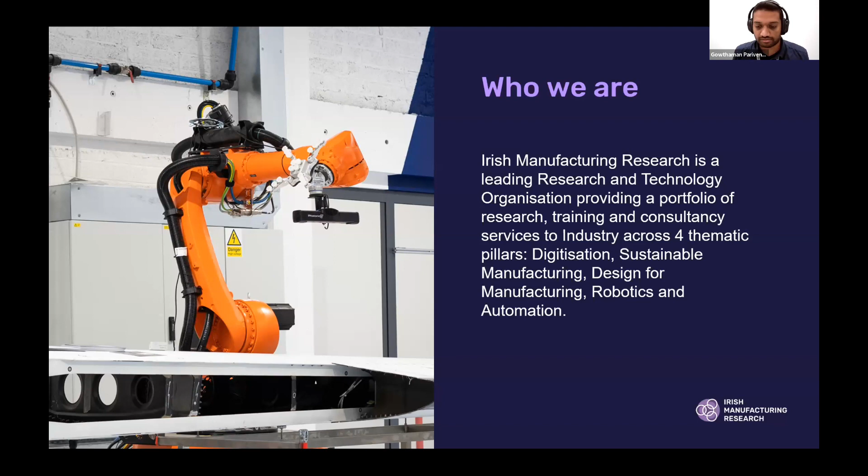So, IMR is a leading research and technology organization. We have dedicated researchers working on digitization, sustainable manufacturing, design for manufacturing, robotics and automation, etc. So, our aim here is to help Irish companies to adapt latest technologies to enhance their production capabilities. So, in that regard, I'm going to show how simulations could be of help addressing some of your manufacturing problems.

So before I answer why we need simulations, I'll explain what are simulations. Well, simulations are representations or imitations of a real event using mathematical models. So why do we need them? Well, they offer cost-effective outcomes for various processing conditions without having to physically perform the experiments or processes.

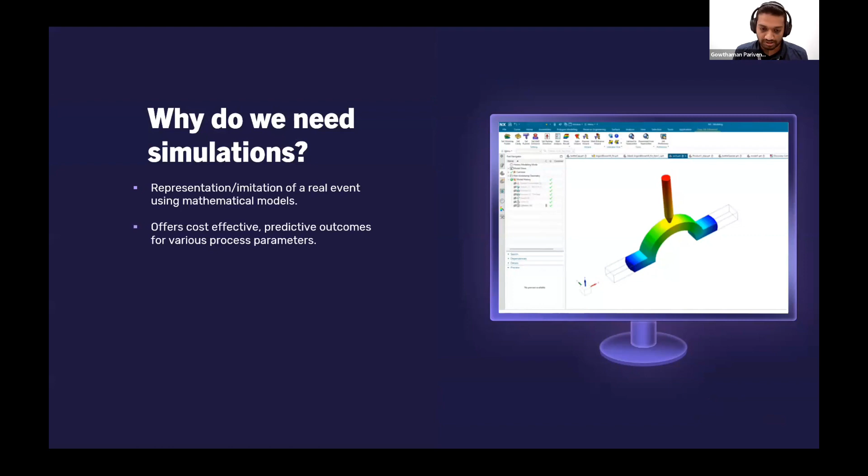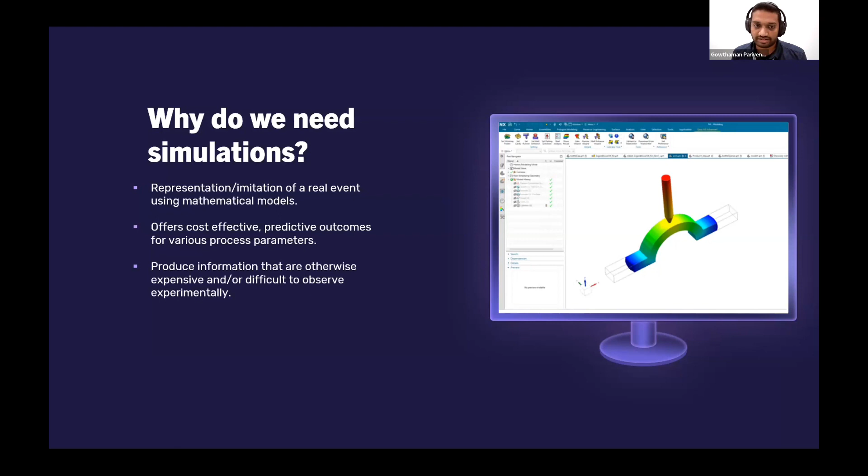And sometimes some of these physical parameters, they are tough to observe or measure using experimental setups. It could be expensive, it could be of a health and safety concern. So in those areas, simulations would be of help as well.

So mechanical simulations, as I said, they typically solve a partial differential equation that describes the mechanism that we are investigating. And throughout this talk, I'll be talking only about physics-based models; the discrete event methods or process simulations or kinematic models are not covered in this session.

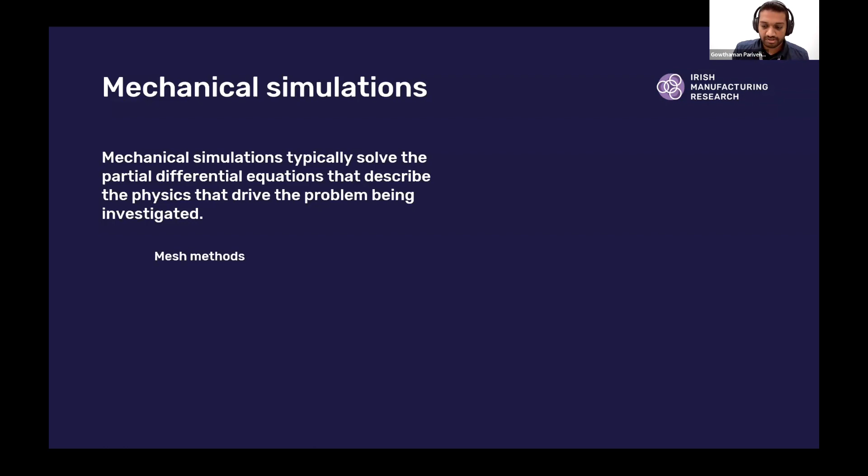So the most commonly used mechanical simulations are mesh-based, and that's because they cover most of the manufacturing problems that we face. And some of the common numerical tools include finite element method, finite volume method, finite difference, etc.

But there are some scenarios where we need meshless methods, like powder or granular geometry. And we treat each of these powder particles as a single entity. And in those scenarios, we might use methods like discrete element method or smoothed particle hydrodynamics or molecular dynamics. So some of the meshless methods out there.

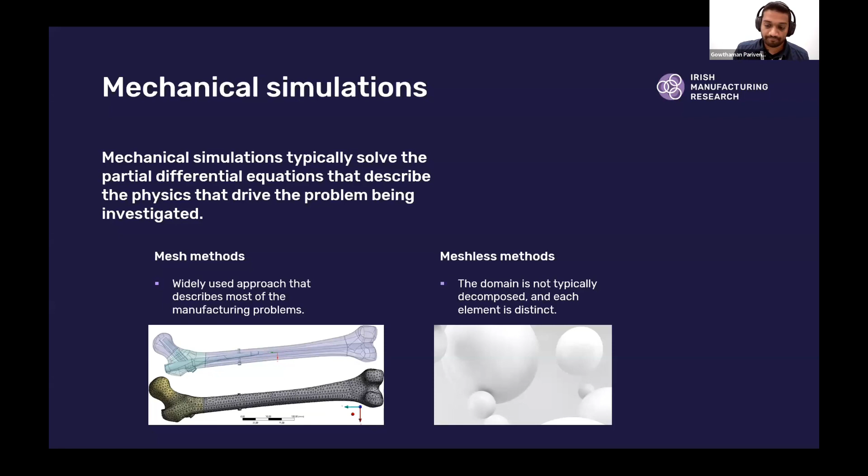So in the next session, I thought I will walk you through the workflow that we implemented in a project where numerical simulations played a crucial role in enhancing the process. So conformal cooling, it's a mold cooling technique in which we ensure uniform temperature gradient through the cooling process. So why do we need this?

Well, in injection molding, when the part is cooled by the cooling channels, the non-uniform cooling builds residual stresses in the part. And when the part is ejected from the mold, it might deform. This, of course, is not desirable for the company. And also because the cooling channels put in effort in cooling the bulk of material as well, there's increased cycle time. So how can we address this?

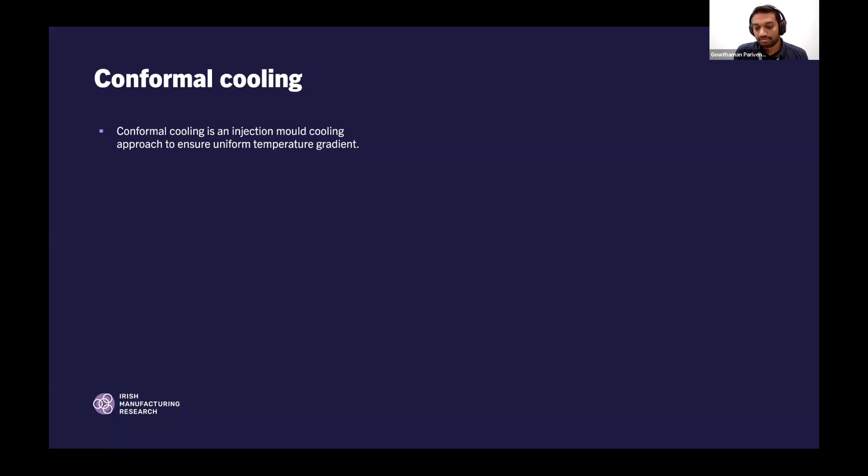Well, we can do that by conforming the cooling channels as close to the part shape as we can. But traditional manufacturing methods are constrained in this regard because the path lines of these cooling channels are 2D in nature. And these 3D conformal cooling channels can be manufactured by additive manufacturing, because that's a layer by layer manufacturing technique, and we can easily achieve these 3D cooling channels.

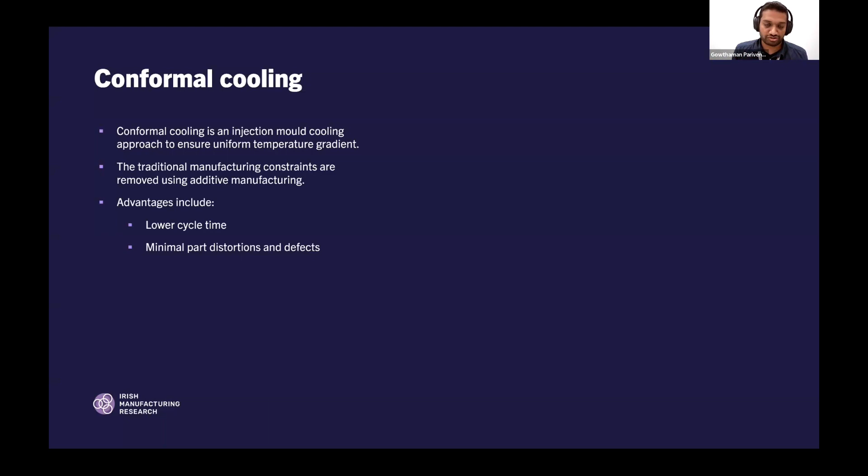So some of the advantages of conformal cooling include, as I said, lower cycle time, and due to the uniform temperature gradient, we can minimize the part distortion and defects, and there's also reduction in energy. And of course, we use simulation in finding out these conformal cooling channel performance, but how do we know if the simulations are right? So that's where we have to validate the model.

So we have a test rig in IMR where we heat a test coupon to a prescribed temperature. And once it's heated to that particular temperature, it shuts off, and the cooling channels within the test coupon cool down the part. And we measure this temperature over time and compare it with the simulations that are run using Simcenter 3D thermal flow model. So once we validate this simulation, we can be sure that it can be translated to the actual part that we are going to investigate.

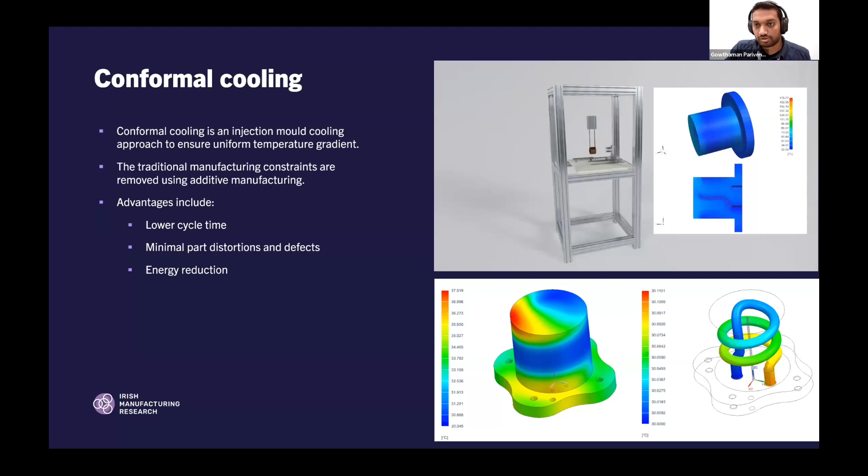So we also run polymer filling analysis using the NX EasyFill Advanced environment. And the reason we do this is because it offers us a quick view of where the hot and cold zones are, where the potential problematic areas are, etc. And based on this, we can design our cooling channels. We can either move the cooling channels closer to the hot zones or move them away from cold areas in order to achieve uniform temperature gradient.

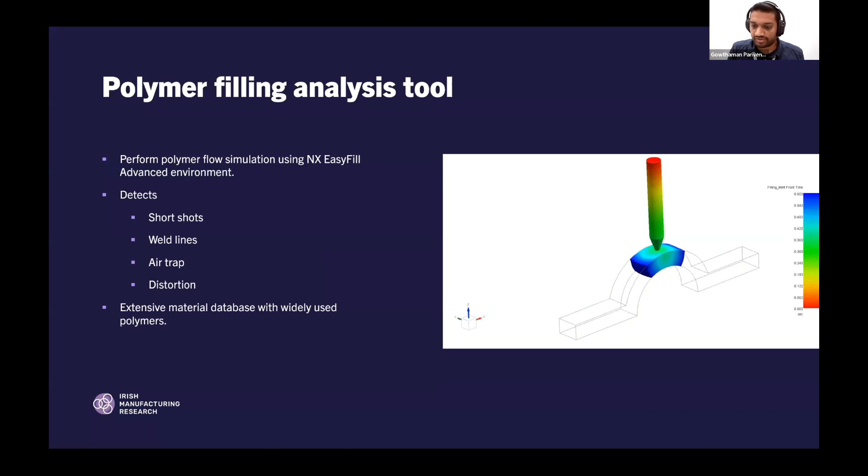In addition to that, we also can detect short shots, and we can detect weld lines, air trap, distortion, etc. And the polymer filling tool also comes with an extensive material database with all the widely used polymers out in the market. So we use the polymer analysis tool in tandem with SimCenter 3D to create these conformal cooling channels.

Here I'm going to show you a case study that we performed for Thormac. I would like to thank Thormac for letting us share the case study for this particular demonstration. So here we have an insert used in injection molding, and it comes with these. We used conformal cooling channels to cool down the surface of the part.

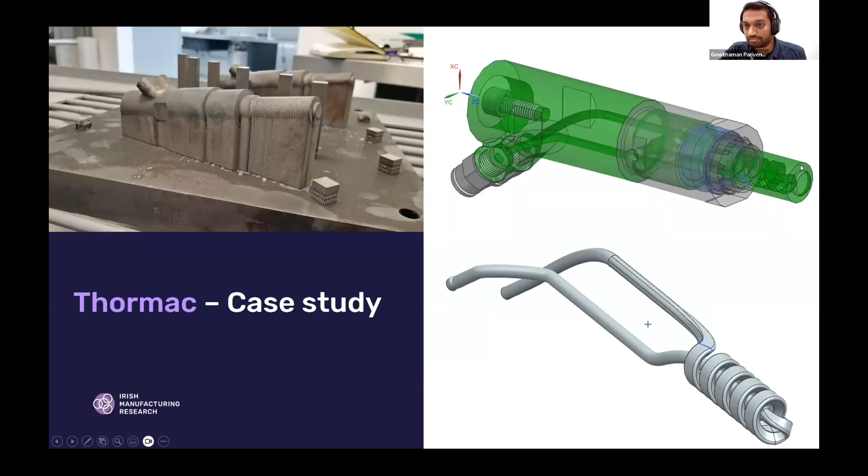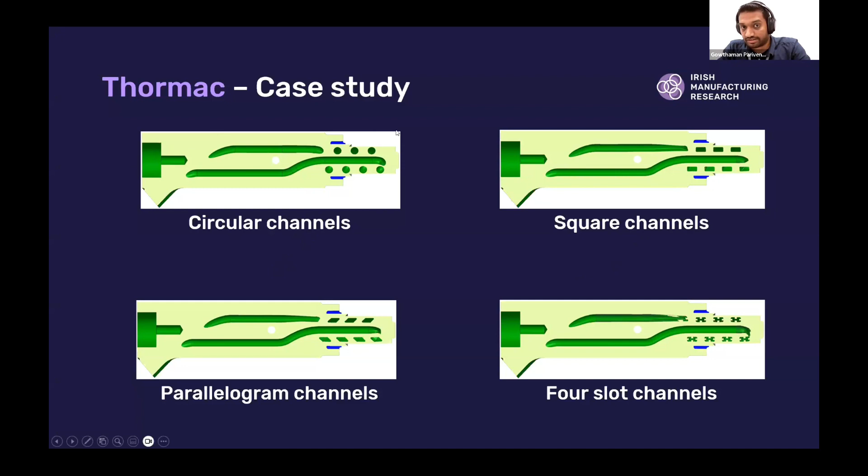We initially started with the circular profile for the cooling channel, and then we moved on to other profiles such as square or parallelogram. And again, I would like to emphasize that these parts can only be manufactured using additive manufacturing. It can be done with traditional methods, but then it's going to be really difficult to achieve these profiles. So the reason we moved on to several profiles is ideally we need a straight line like this to achieve a really nice consistent cooling.

But physically, that's not possible because for that to happen, we need just a single cavity that runs along the surface of the insert. And we start with the next thing, the circular coils that coil around the axis of the part. And we noticed that there is significant cooling on the surface where the circular channels are, but then there is an increase in temperature between them. So this ripple effect kind of induces non-uniform cooling.

So in order to address that, we have to either reduce the pitch, so that will reduce the cooling errors, but then we compromise on the structural integrity. So the other approach we use is replace the circular channels with square profiles. And with the square profiles, again, we notice there are issues between the channels. So that's where we use the parallelogram profile because the slanted edges of these parallelograms are exposed to the surface. So they kind of aid in cooling the surface a little bit more. And all these are done with the knowledge we gain from running numerical simulations in Siemens SimCenter 3D.

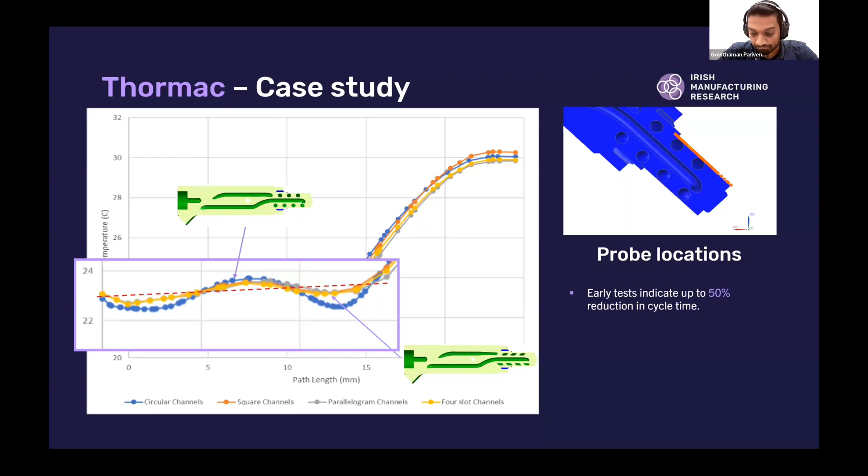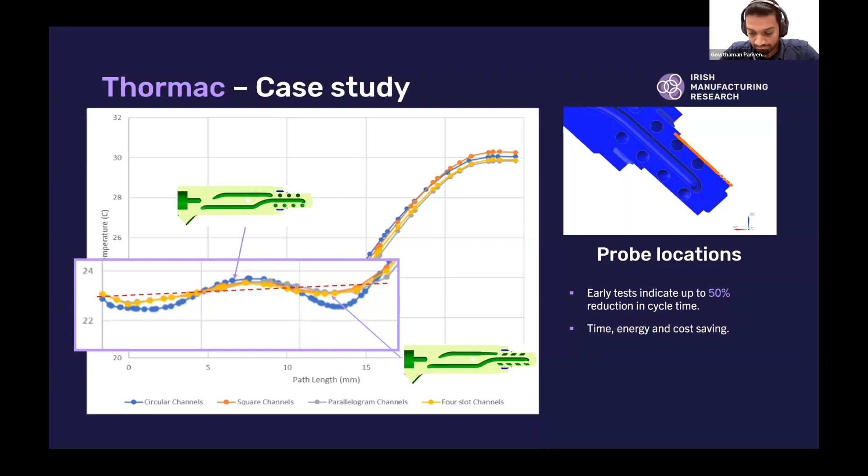So what does it mean? Well, it saves a lot of time for the company. They can now produce twice the number of parts in the same time. It can also save them energy and cost because they may not need to run two machines in parallel just to produce n number of parts. They can just achieve it with one. And these are some of the real impact that we achieved using conformal cooling channels in the injection molding process, where simulation played a crucial role.

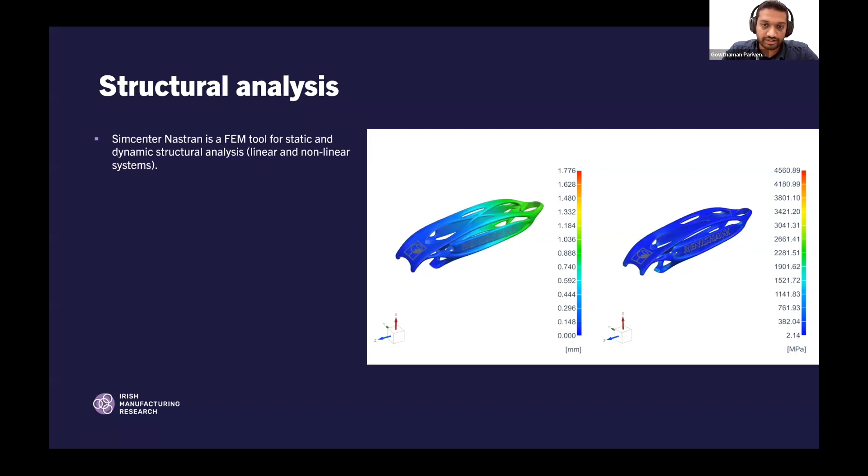And when we design these parts, we also have to make sure it's structurally sound because these parts are going to be exposed to a lot of pressure and wear and tear, etc. So we run a quick static study for these parts using the finite element tool in Siemens, that's SimCenter Nastran. And it has other potential applications as well, like it can be used for buckling, rotor dynamics,

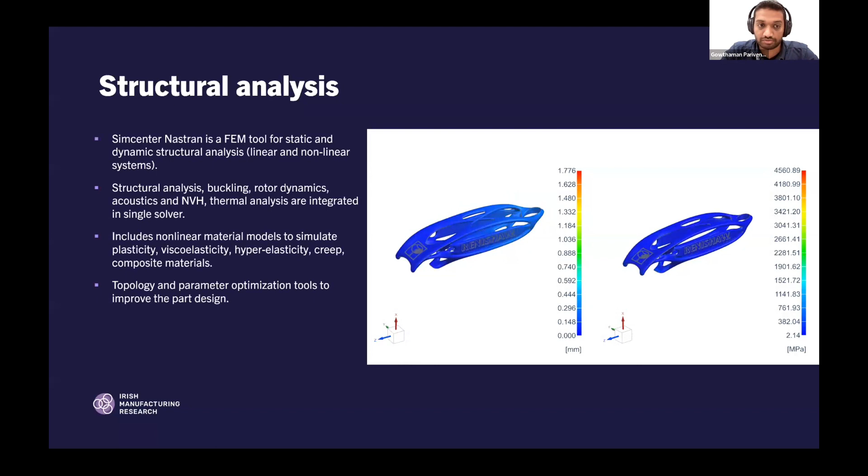NVH, thermal analysis, etc. And it can also model various material behavior like plasticity, viscoelasticity, creep. And it also comes with really advanced parameter and topology optimization tools in order to improve your part design. So these are some of the features in Simcenter.

And also, I mentioned additive manufacturing a lot, and we need to use the right set of processing conditions to print the part right the first time. And this is often really difficult, and simulations can play a role in helping us there as well. So the Siemens additive manufacturing tool can help us define the part geometry on the build plate with support structure, and then we can run the simulation to predict the temperature distribution. We can know whether there'll be any recoater collision, whether there'll be any overheating in the layers, whether the part will distort before or after the support removal.

And it also has a feature where it pre-distorts the part to create a compensated model. So when we actually print and remove from the support, it goes back to the original shape that we intended in the first place. So for example, the tool you see here, when we print this, because it is long and slender, it tends to peel off the support structure. So by using simulation, we can find the right orientation, the processing conditions, the location that we have to use in order to print it right the first time.

So before I move on to the next session, I just would like to summarize some of the features that we use in NX. So Siemens NX is a really powerful tool. I just talked about some of the modules that we use in the workflow. It offers much more than what we showcased here. And also, it offers a unified workflow.

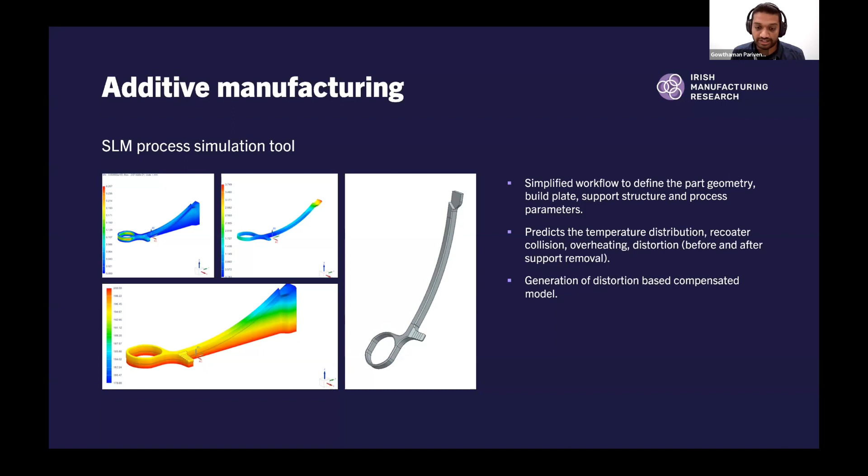By that, I mean, right from the design engineer to a simulation engineer, the technologist, all of us can use the same tool. And we can share the files without having to change the format. So it's a really powerful tool, and it's really easy to use as well. And with that, I will move on to the next tool.

That's OpenFOAM. OpenFOAM is also one of my favorite numerical tools out there. It is an open source tool that is primarily used for computational fluid dynamics, but other areas of application include heat transfer. It is used in electromagnetics, acoustics. It has a really sound solid mechanics platform, and it is even used in finance, like they solve the Black-Scholes equation to predict commodity prices over time. So these are some of the areas it is used.

And OpenFOAM versions come with a number of tutorials. And often we take the tutorial that resembles our problem at hand and we build on it. So it's a really nice feature to have at hand. And OpenFOAM is highly parallelizable. It is customizable and it's robust in nature. And there's also excellent support from the community.

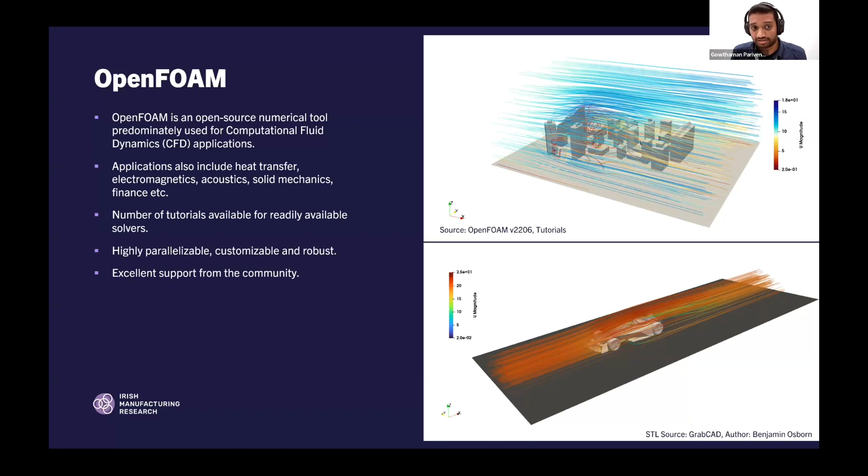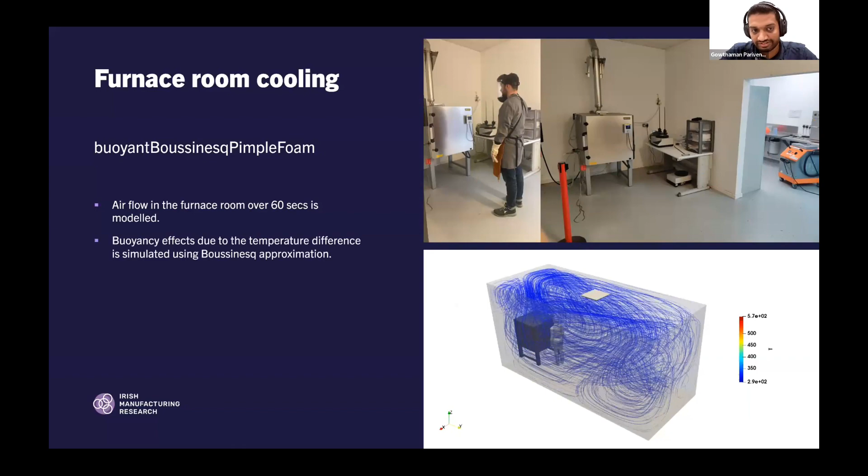So just to illustrate what OpenFOAM can do, this is one of the analyses that we did in IMR. It's to simulate the furnace room cooling over 60 seconds. So we study how the air flows when the furnace is opened, and we include the buoyancy effects due to the temperature difference using the Boussinesq approximation. So you might have seen this long name in the slide. These are the names that are often seen in OpenFOAM solvers. It basically describes what the solver is meant to do.

And we use the inlet condition for the AC, which includes both the flow and temperature, and the temperature of the furnace, and study the airflow. Some of the similar applications include HVAC, aerodynamics, architecture, and in fact, urban planning.

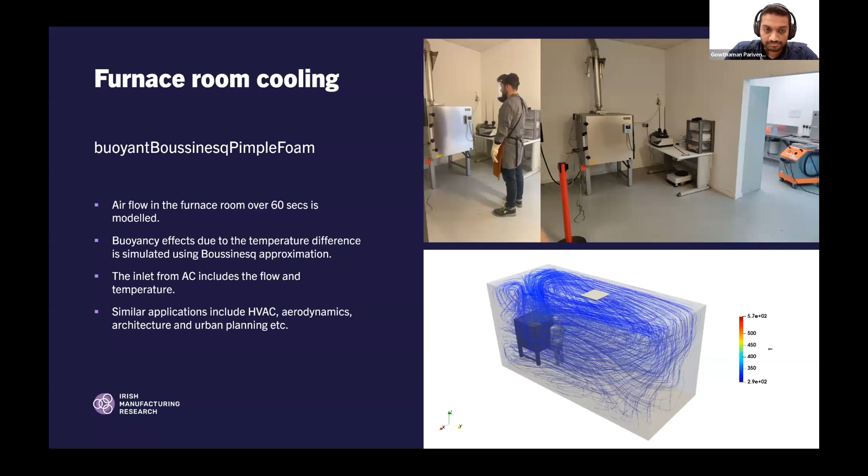OpenFOAM also comes with a really powerful set of multi-fluid systems. Like I said, the mesh methods often subdivide the whole area into smaller parts. And how it works for a multi-fluid system is it calculates the material properties based on what percentage of each material is in every cell. And we can include several physical phenomena like phase change due to solidification, due to melting, evaporation. All these physics can be included.

Even species transfer from one phase to another. For example, transfer of CO2 from biogas to water during the bioscrubbing process. These physics can be included in the solver. And some of the applications of multi-fluid systems include bio and chemical reactors, fluidized beds, mixers, etc.

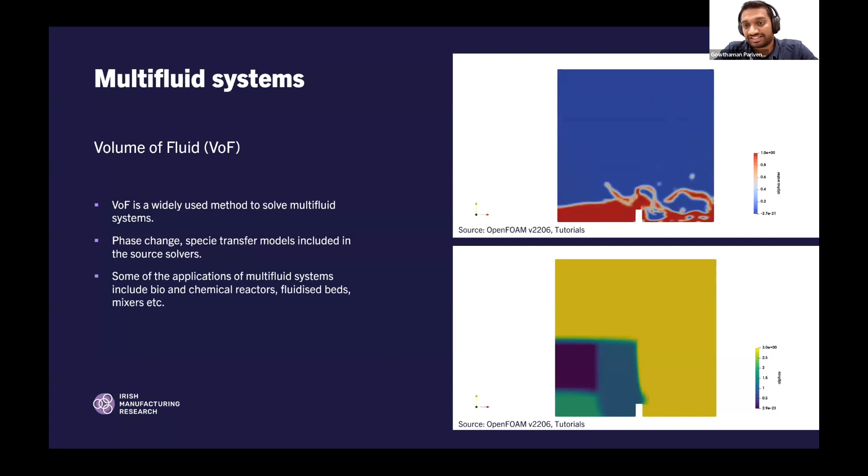So this is one of the classic examples from the multi-fluid tutorial cases in OpenFOAM. It's water breaking over a dam with the surface exposed to air. So as you can see, the interface is captured very well in detail, and it can in fact be translated for multiple fluids with all the fluid interfaces captured. So that's the OpenFOAM multi-fluid system example.

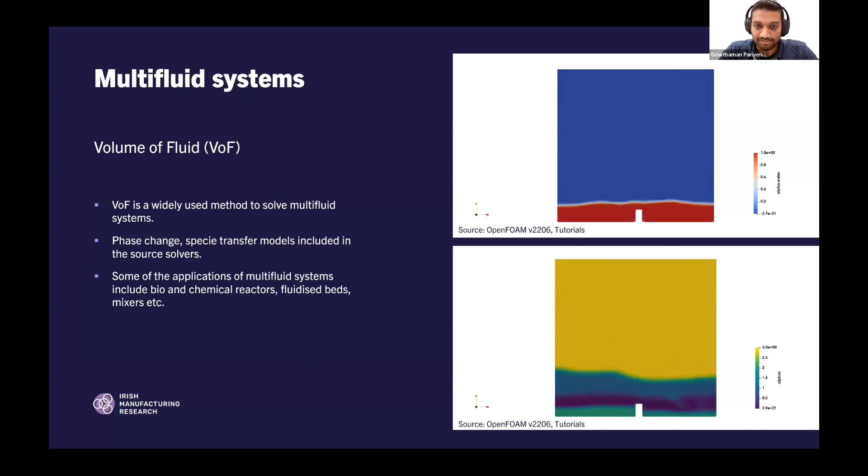And where did we use it? We ran a quick gas enclosure simulation where we modeled the argon gas fill in the AM prototype enclosure. So we used a volume of fluid method to track the inert gas and the air phases individually. And we used that to know what should be the flow rate of the gas diffuser, where it should be located, and whether we can maintain a layer of argon over the test specimen all the time.

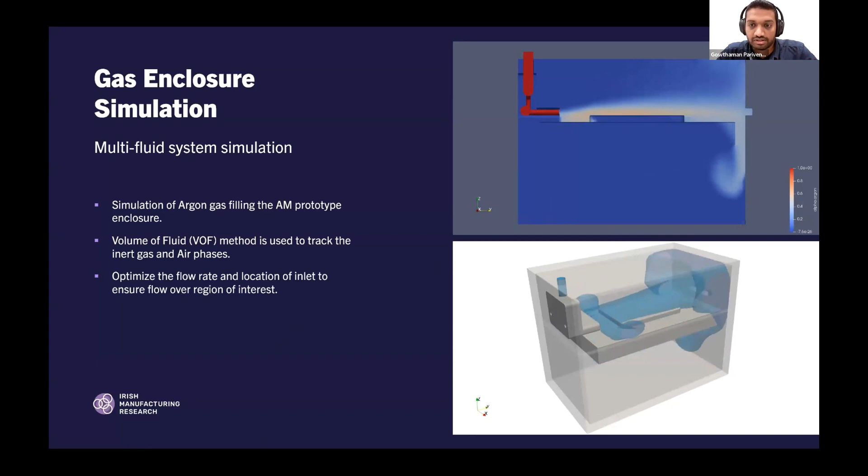So these are some of the things that we are looking at while running the simulation. So again, this answers a lot of what-if questions for us instead of physically loading the material into the enclosure and seeing it.

Another example of an OpenFOAM multi-fluid system is MoldFillFoam. This is a customized solver that we built entirely at IMR. It is used to model polymer filling in the injection molding process. It's very similar to EasyFill, and we use a non-Newtonian assumption for polymers. We use temperature-dependent thermophysical properties, etc.

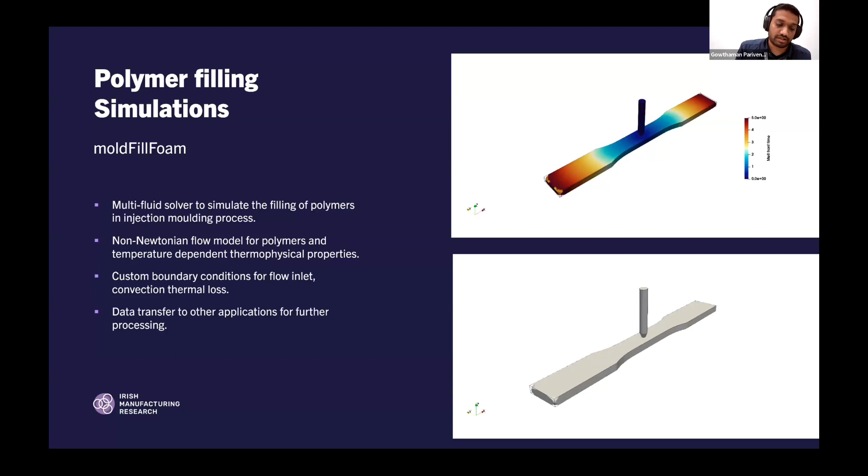And we also built custom boundary conditions for flow inlet, convection, thermal loss, etc. And the reason we have this is to transfer data to other applications like Grasshopper for processing. And like I said in the earlier slides, OpenFOAM is highly customizable. So if we have a particular set of physics that is not addressed by a lot of software, then it can be included and simulated using OpenFOAM. So that's what I meant by customizable.

And solids4foam was the solid mechanics platform I mentioned. While most solid mechanics solvers are based on the finite element method, this one is based on finite volume. It is a standalone toolbox for solid mechanics models, and it is compatible with both OpenFOAM and foam-extend. It is actively supported and developed at UCD and also by contributors around the world.

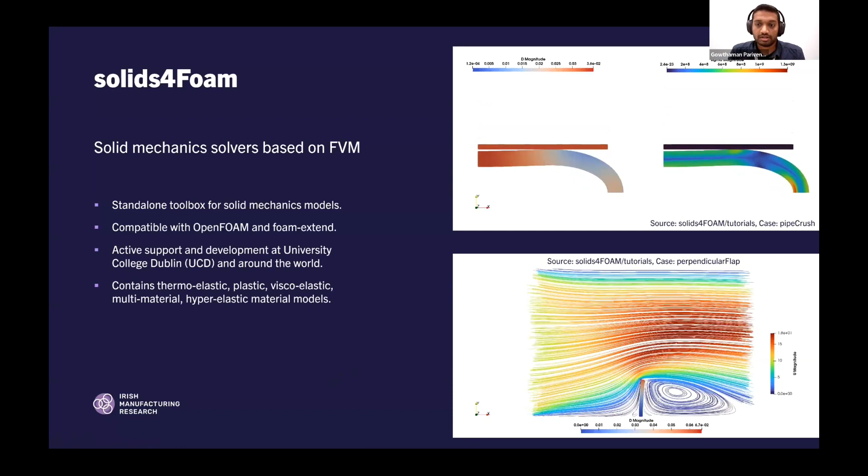It includes material models like thermoelastoplasticity, viscoelasticity, and also fluid-structure interaction solvers, like shown in this example, where you see a flow of fluid over a flap. So these are some of the features included in solids4foam.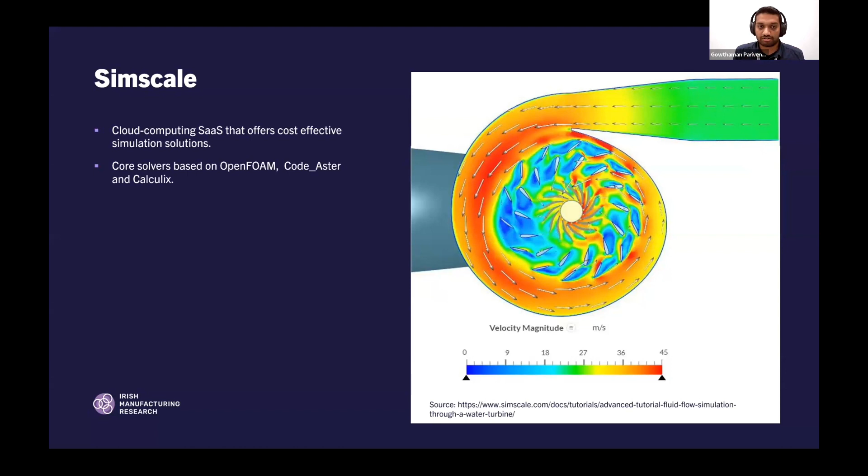And because I was talking about OpenFOAM, I thought I would discuss a little bit about SimScale. SimScale is another tool that we use in IMR, and it's cloud computing software that offers cost-effective simulation solutions. It is based on solvers like OpenFOAM, Code_Aster, CalculiX, etc. They also have their own niche set of utilities. It has a wide range of applications in fluid, structural, thermal simulations, and coupled systems as well. And it comes with a graphical user interface for the simulation workflow.

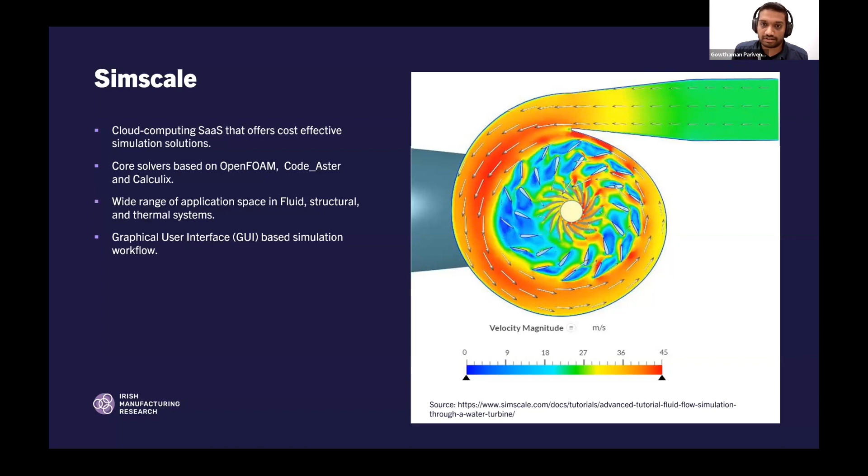So the reason I included SimScale is, if anyone is interested in running a case on a solver like OpenFOAM but is not really keen on using a Unix-based or Linux-based terminal approach, then SimScale offers a wonderful alternative as well. So with that, I conclude the solid and fluid cases.

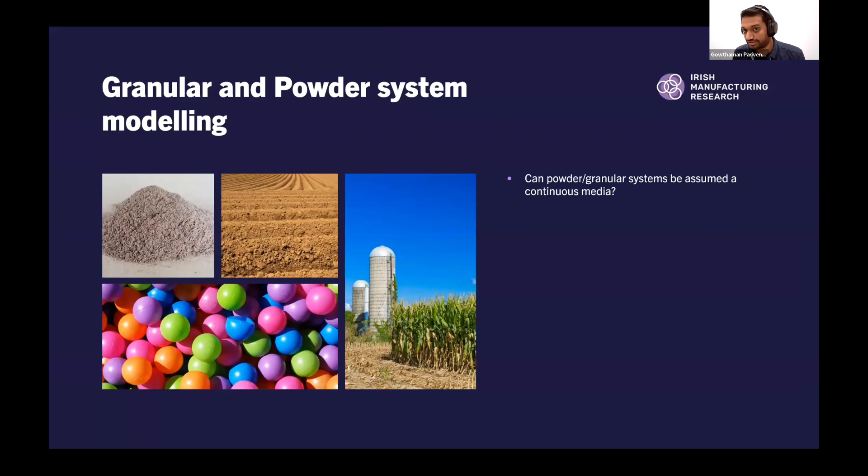So for all the topics I showed so far, you can assume the material to be one single continuous medium. But what about powder or granular media? They're not continuous. As a whole, the powder system behaves like a fluid, but each individual particle is a solid. So can we really assume it is a continuous medium? Well, if not, how can we model it?

The discrete element method is one of the numerical methods that model the interaction between particles. How it works is the total force on every particle, due to collision with other particles or cohesion, and body forces such as gravity or magnetic fields, is calculated. And using the force, the velocity and new position of the particle over the entire time is simulated.

Again, it has a wide range of applications, ranging from powder metallurgy, which is of particular interest to us in IMR because we handle a lot of powder systems in the additive manufacturing machines here, to powder behavior in pharma and chemical industries, and also agriculture and geotechnical industries, such as soil compaction or plowing simulations, etc.

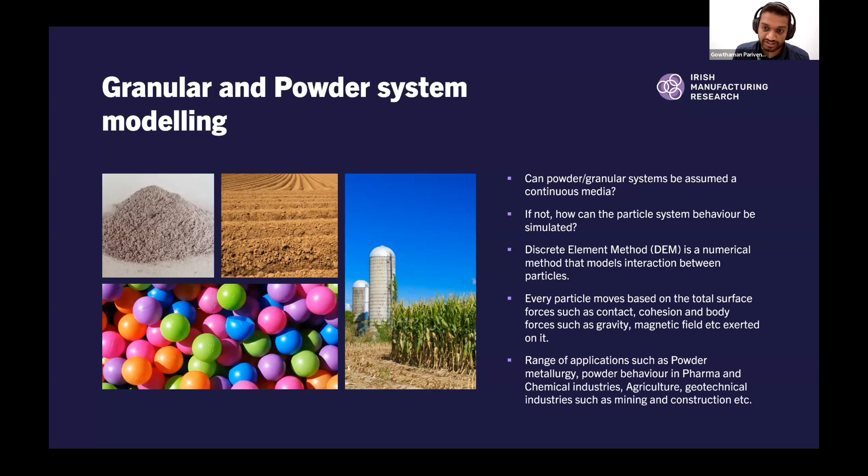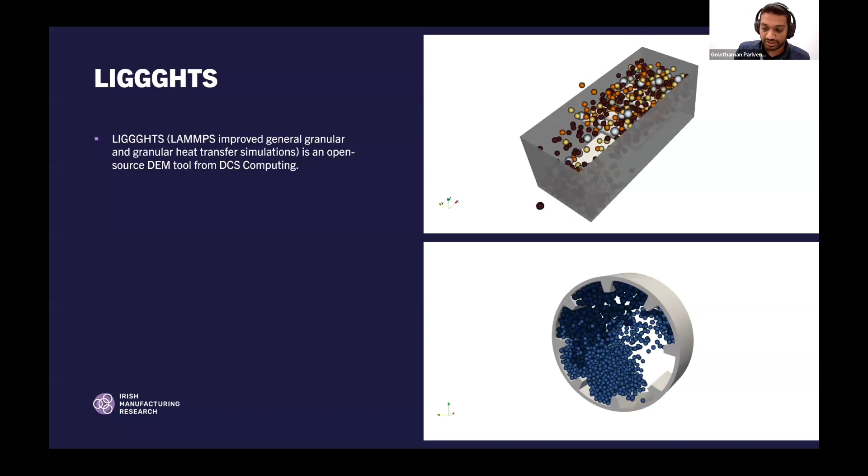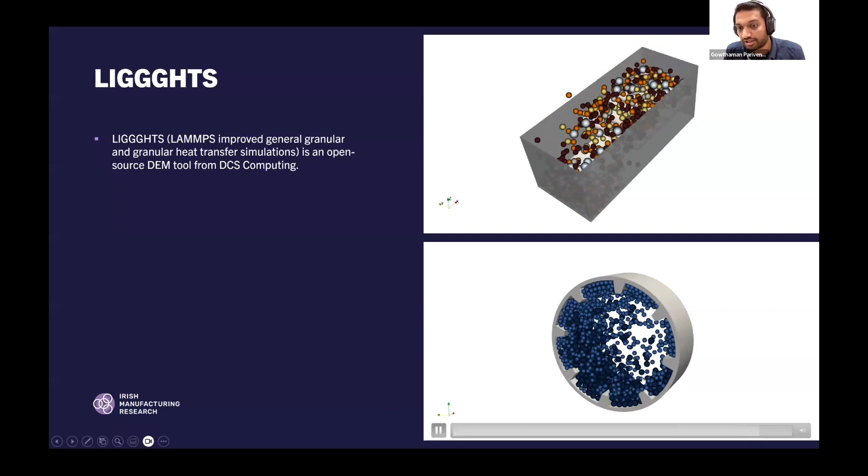So LIGGGHTS is the tool that we use in IMR for discrete element method simulations. It is an open source tool developed by DCS Computing. Here you can see a couple of simple examples where particle systems are modeled for the flow on a conveyor belt and also mixing of particles of different sizes in a rotary drum. These are just a couple of examples where LIGGGHTS is used.

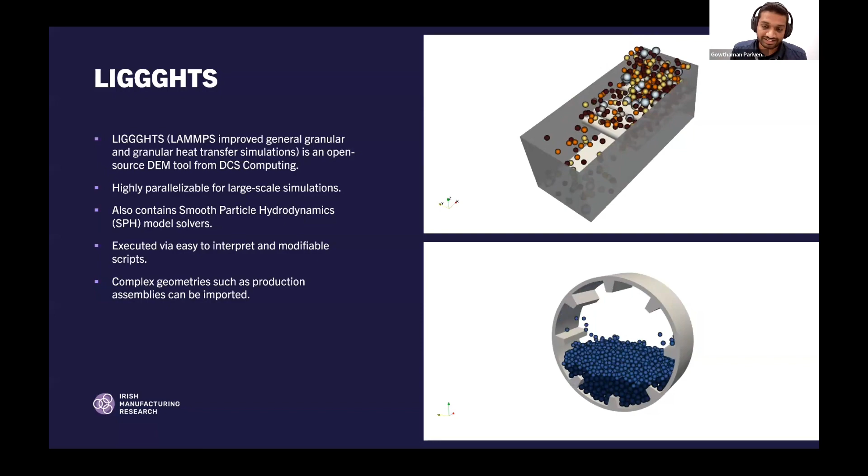It's again highly parallelizable, and it also comes with a smoothed particle hydrodynamics solver. It is executed via a terminal like OpenFOAM, but the scripts are easy to interpret and modify. Complex geometries, like the production assemblies of the rotary drum, can be imported as STL as long as they're clean and of high quality, and used in the simulation. They also have a platform where they can couple LIGGGHTS with other CFD tools for resolved and unresolved fluid-particle systems.

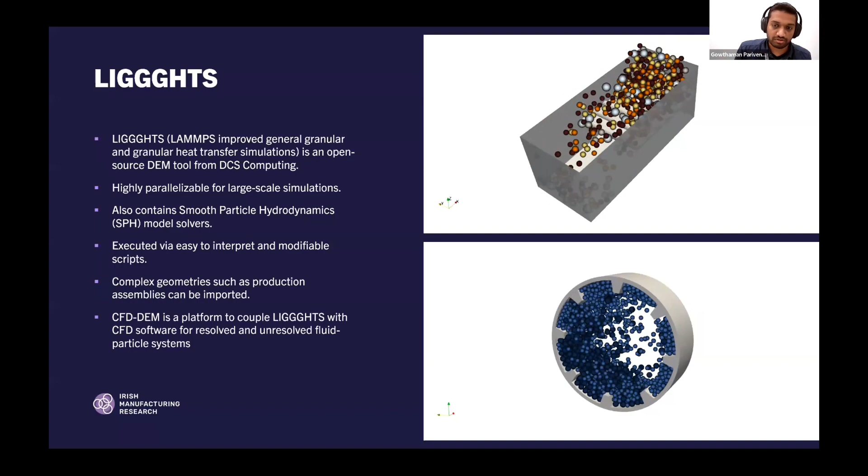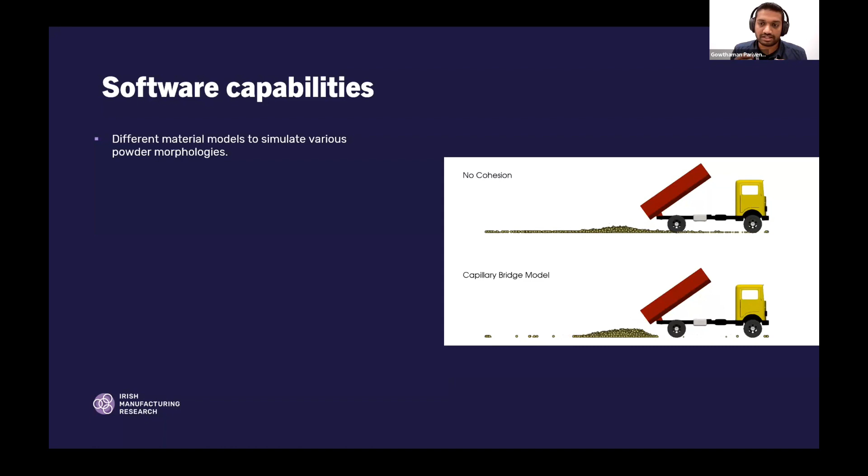Some of the capabilities of this particular software include different material models to simulate various powder morphologies. For example, wet sand wouldn't behave the same as dry sand. So here you can see in the simulation that the wet sand tends to pile up more than the dry sand. For this, they use capillary bridge models to simulate the water bridges between the particles that kind of stick the particles to each other.

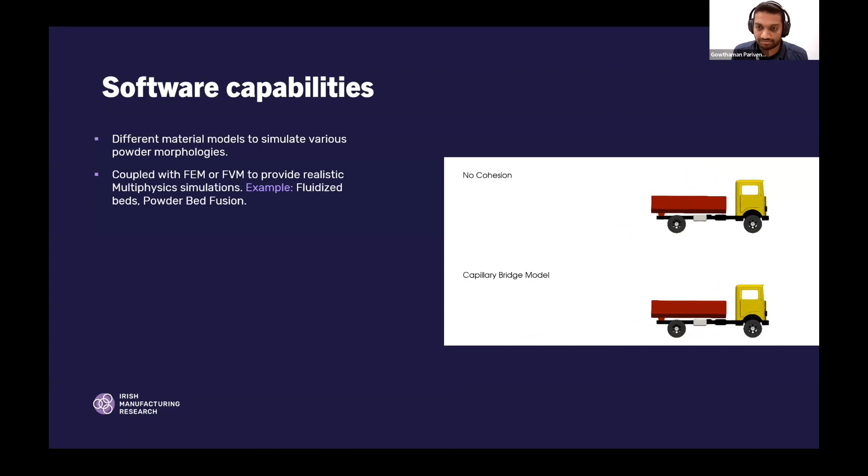And also they have material laws that define dry cohesion in powder systems as well. Again, these can be coupled with other numerical tools to provide realistic multi-physics simulations, like powder bed fusion, for instance, where there's a powder system where we also have to study the flow model. Aspherix is their commercial version of the tool, where we can also model non-spherical particles like tablets, capsules, etc. And they offer much more in this commercial version as well.

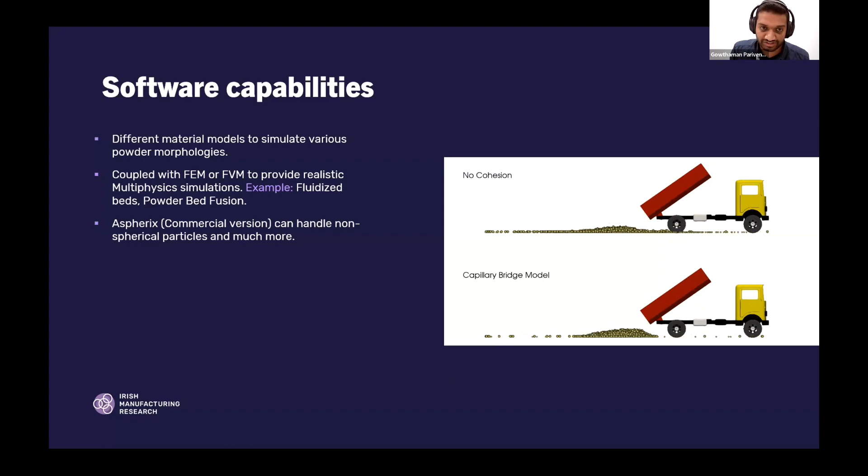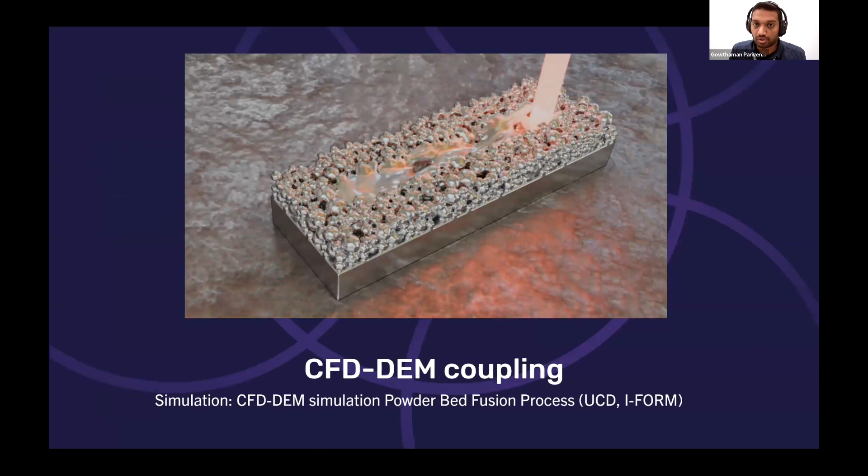So here's an example where a DEM CFD tool is used in tandem. Discrete element method was used to create the powder bed in the powder bed fusion process, and then the OpenFOAM CFD tool was used to model the melting of powder particles and then the flow and subsequent solidification due to the laser irradiation. So these are some of the examples where coupled simulations or standalone tools were used.

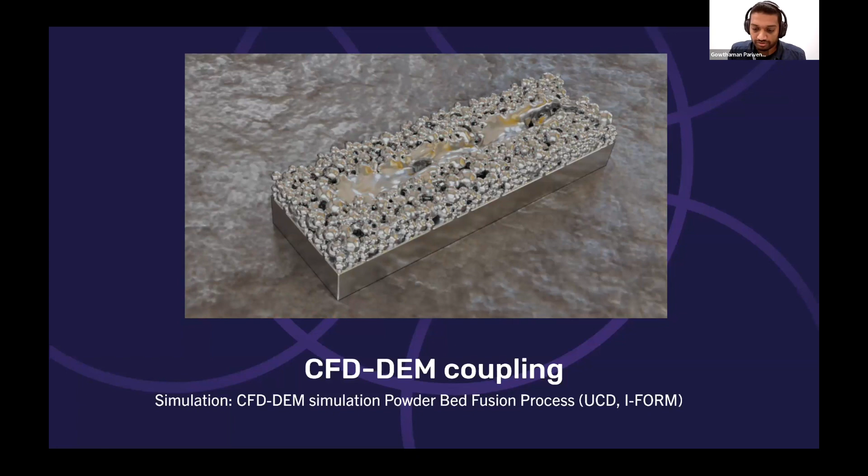To summarize, simulation is a really handy tool to have in early stage product development because it can answer a lot of your what if questions without having to build a prototype or a jig. Simulation can also provide insight into the physics that take place in the process. And even if you have an existing system, it can indicate any potential time, cost, or performance savings, etc.

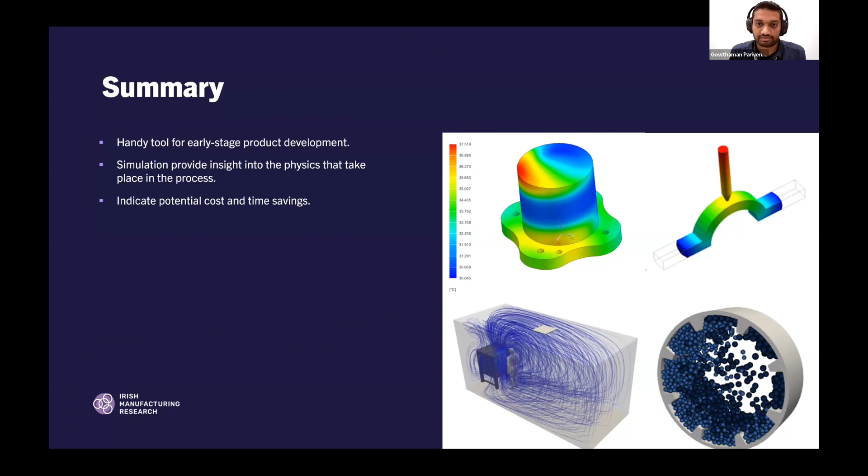Was that a lightsaber at the end? Lightsaber? I designed it like that, yeah, indeed.

Well, look, when you're looking at 50% reduction in cycle times, you can see the value of this. We've a couple of questions in, so I'll get you to stay on.

First question here: are open source softwares reliable? Open source softwares are reliable in my opinion. There's a widespread idea that they may not be. They are widely used in academia, and using open source tools, you're in direct touch with the developers, and there's huge support from the community. One other advantage I see is in many of the open source tools, you can see what is happening in the background. You can access the code, so it's transparent, and you can modify it as well if there is any bug. But in my opinion, it is reliable.

Great, thanks very much. Is there funding available for this? Yeah, there are certain funding schemes that we can look at to help SMEs run simulations. We are happy to discuss further. Feel free to reach out to us, and I'll actually share the contact details here. Perfect. Feel free to reach out to us and we can explore other funding opportunities.